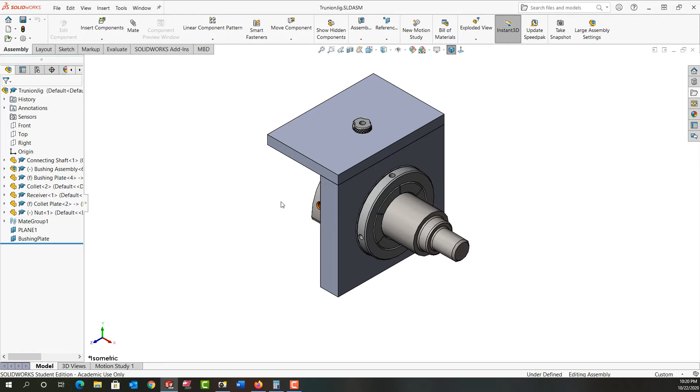As I continue the design of my drill jig, the next thing I want to think about is how I'll index my part. I know I can loosen the clamp and manually index it, but how do I accurately index so the hole is up?

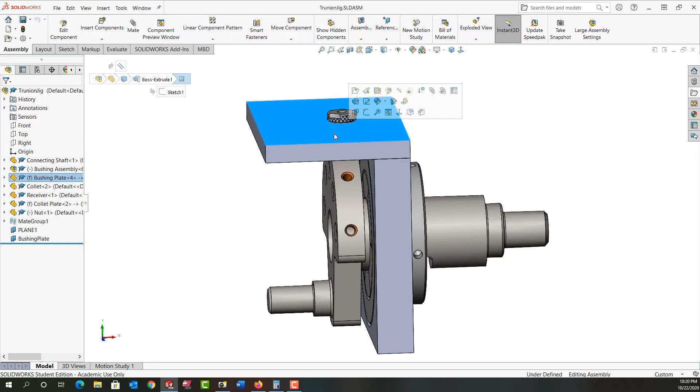I'm going to use these holes to index the part because they've already been machined. These are the last holes I need to put into this particular part. So now that I realize I want to use these, I have to think about how I'm going to do that. I'm going to go back and edit this plate to add another plate that hangs down in front, and then use a pin that goes in here to lock the indexing.

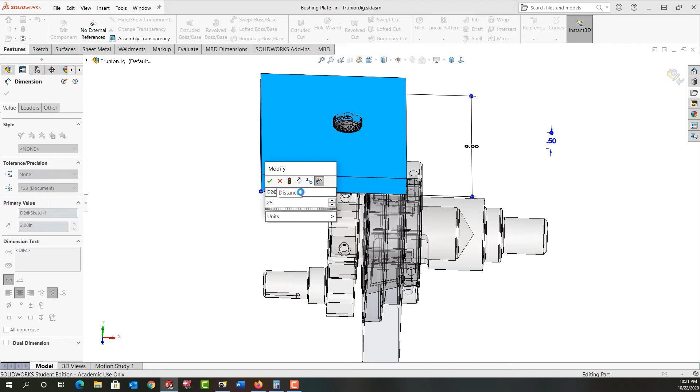I'll select this plate, edit the part, double click on it and look at its dimensions. Again, this time I dimension from this face, and I'll stick with that. I'll select this dimension, change it to 1/4 inch, rebuild, and say OK. That looks reasonable, and I'll stop editing that plate.

Now I want to add another plate from here down over the hole that I can put the indexing pin through. I'm going to come back up to Insert Components, select New Part, click to accept it, right click on the part, and rename it. I'll call it the indexing plate.

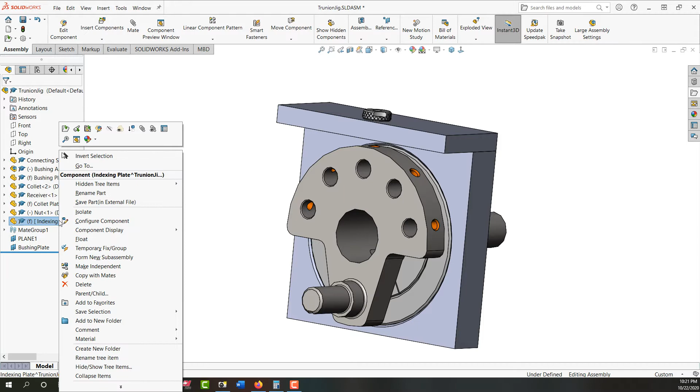Slide this over, and I want to create that plate now. I'll right click. I also want to tell it to save the part in an external file. I'll select OK, select this again, and tell it I want to edit the part. I'll select this face here and look normal to it.

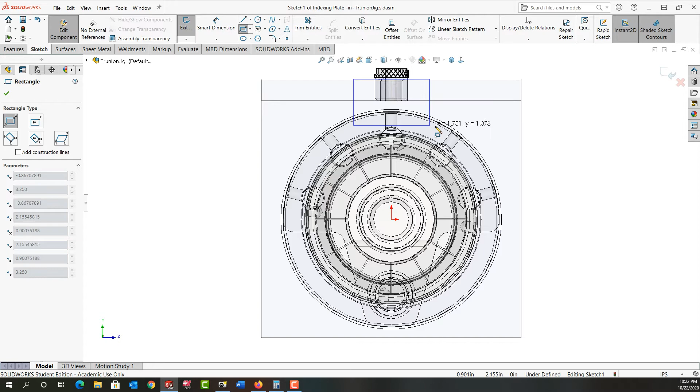Once again, I'm going to create an extrude boss using the corner rectangle. Let's come out here, and I'll create the rectangle. I'll push escape. I'm going to add a center line to this as well.

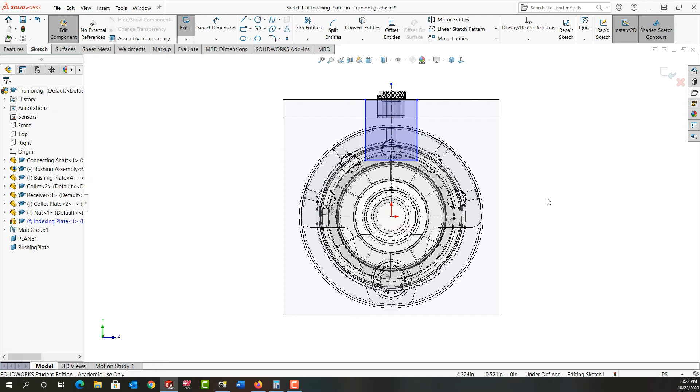I'll zoom out a bit, add my vertical center line. I'll select this edge, hold control, select the center line, still holding control, select this line, release control, and add the symmetry mate. I'll use mouse gestures to activate smart dimension, and I'll dimension this 1.25 inches, rebuild it, and see what that looks like.

I'm just going to move this over here. What I'm trying to pay attention to is the hole, because my pin will be the same size, which is 1/2 inch, and I need to make sure it's low enough. So this is fully defined.

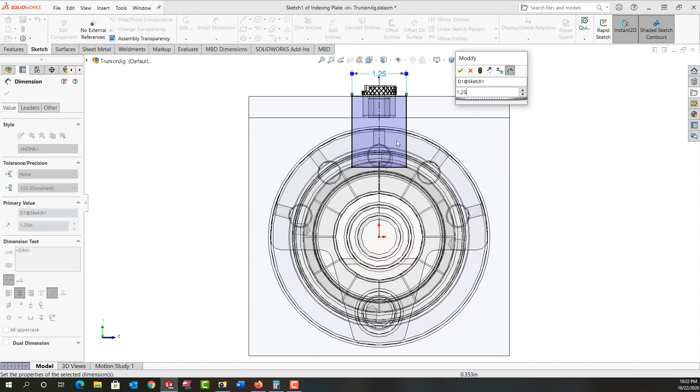I can accept this, but I've accidentally added a relationship somewhere I don't want. So I'm going to come up to the all-seeing eye and show the relationships. If I zoom down, I have a coincident here I didn't mean to get. So I'll select it and delete that coincident.

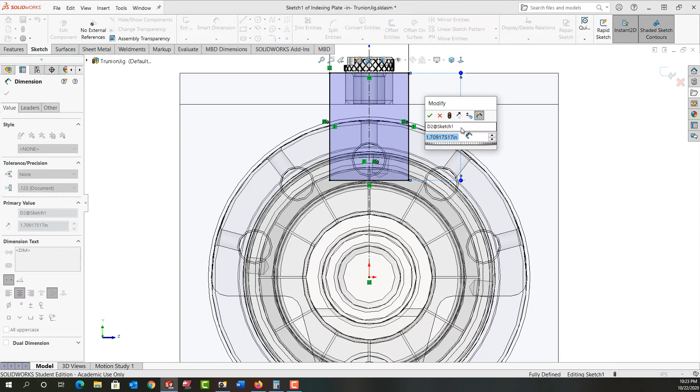Now I can drag this around. Be careful when I release it that I don't add a relationship again. I'll activate Smart Dimension, and this time I'll dimension this down 1.75, and say OK.

I'll rotate around a bit so I can see the direction of the extrusion. This plate, I'll make 1/2 inch thick. I think that'll work, but if it doesn't, I'll alter it later. I'll say OK, so I have that.

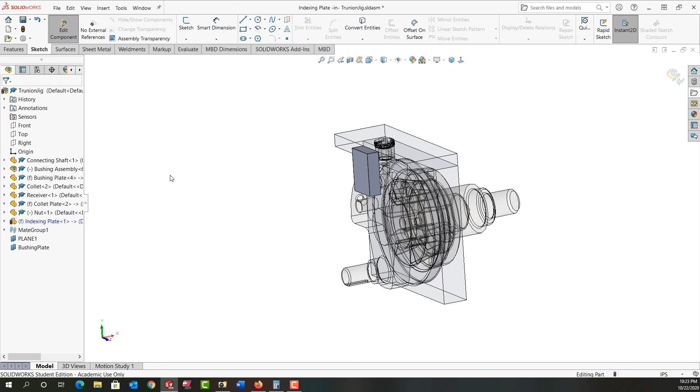Next, I'm going to select this face and look normal to it again. This time I want to do an extrude cut. I'll go back to the Features tab, tell it it's an extrude cut, and I want to convert this edge here. Whoops, that circular edge. I'll select it and say Convert Entities, and now I have my circle.

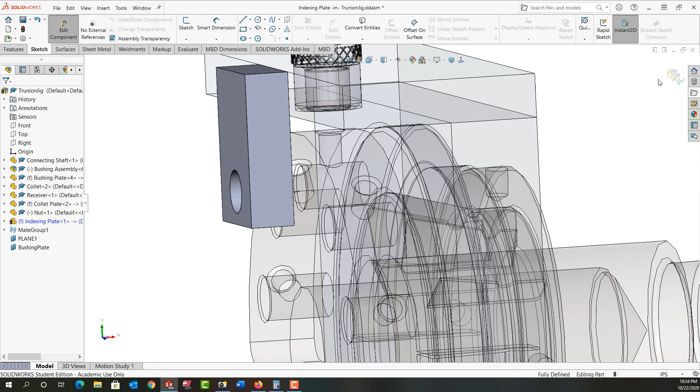I'll right click and exit the sketch, and I'll tell it the end condition for the extrusion is through all, and say OK. I'm going to stop editing this part, rebuild everything, and save.

Next I just want to have a look and examine things and see where I want to go next. I'll put it back into the isometric view and fit the screen, and rotate around. I know there's still lots to do, but I think this will function for the indexing pin. I still have to add bolt and dowel holes for everything—we'll come back and do that later. For now, this looks like it will be functional. We'll see as we go through the design, and we'll continue by creating the indexing pin.